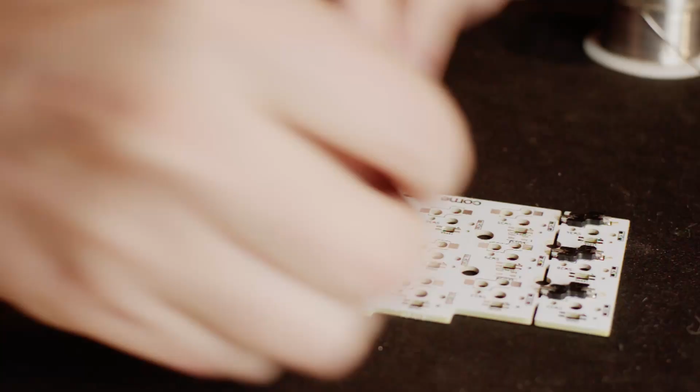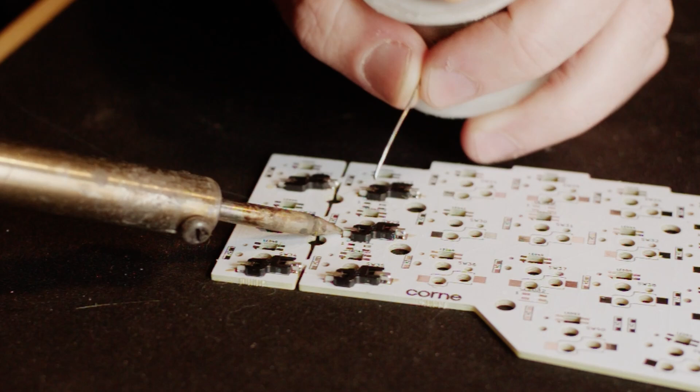The build guide starts with soldering in hot swap connectors, which made installing the diodes a bit tricky, so I put the diodes in first on the second board. These things are small, so something to improve your vision will help. I'm using pretty basic equipment here, and with some better stuff, I'm sure it would be easier. But this can get the job done, or most of it. More on that later.

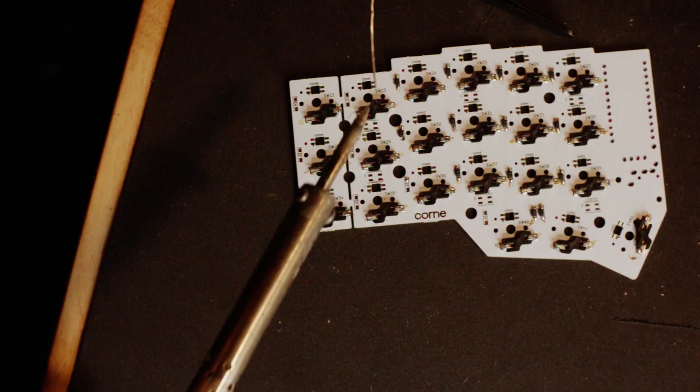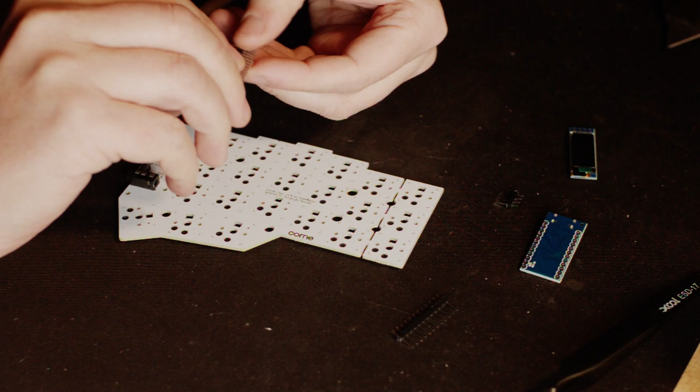Compared to the diodes, the TRS jack and reset button are a breeze, and the change to a through-hole component was a relief. The microcontrollers are straightforward soldering, at least for me. I've done a lot of these and it goes pretty quickly. With them in, I can solder in the OLED screens, which are just as easy.

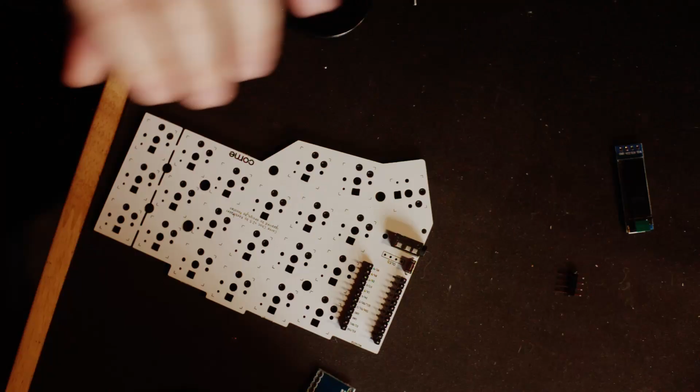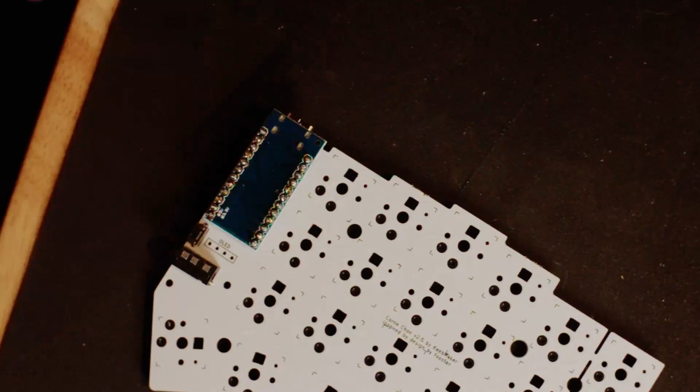The build guide states that the microcontrollers should be programmed before soldering, to test that they're functional. These don't have built-in reset switches, so you'll have to jumper the points to get that to happen. I didn't bother, and they worked fine. I chose to forego soldering the tiny surface mount LEDs, as I don't need or want them in this build, which takes out a considerable amount of complexity for me.

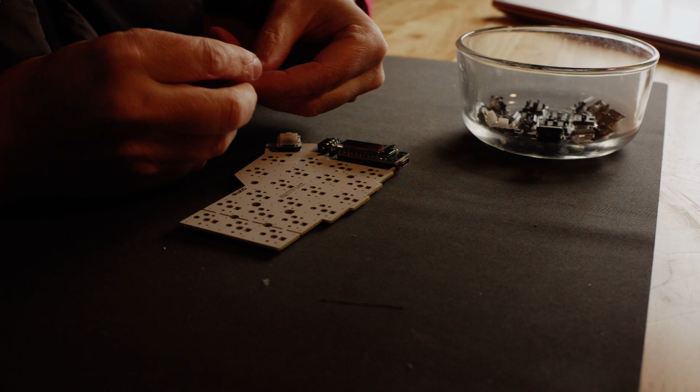The last step to complete these boards is to install the switches, and it's straightforward. It's a great idea to get them in before you program the micros, so you can immediately move into testing. As for programming the microcontrollers, I'm pretty familiar with the process, so it went easily for me. I just followed the build guide and flashed it with a QMK loader. It's pretty easy. You just set it up and then double press the reset button with the auto load selected, and it does its thing.

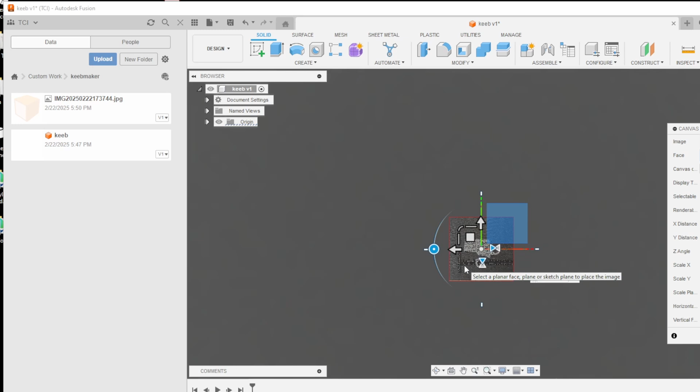I wanted a case that was a step up from the 3D printed options, and as I have a CNC and the ability to model and make a custom case, I probably should. I liked the combination and contrast of walnut and brass, so I designed a case that could integrate some knurled brass hardware for the tenting. I scaled an image in Fusion 360, drew the outline, set a few lines, and extruded the profiles I was looking for. Then I rounded off the sharp edges, and from there it was easy to design some toolpaths and machine.